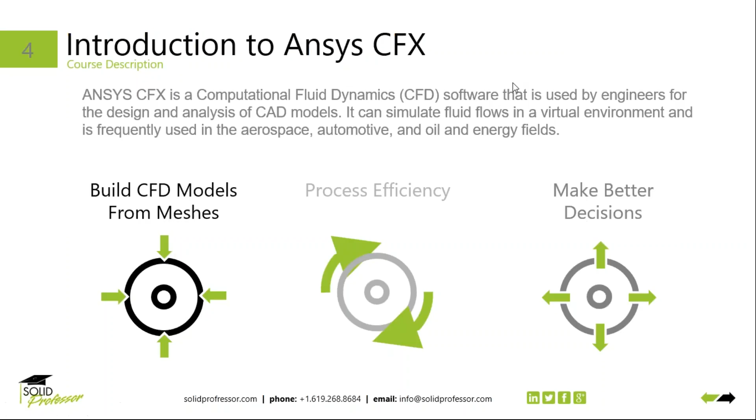We will jump in now and actually start playing a few of the videos here. Brian, do you want to talk briefly about what's covered in this lesson on mesh generation? Okay, sizing a mesh. I don't know if there's going to be the intro into what this is.

This is the example that you're going to see throughout most of the course that we're going to be doing all this analysis on. It's just a section of rigid tube where we have an inlet located there at the top, and the flow just goes in, makes a U-turn, and discharges there at the bottom. It's just a good representation of a simple geometry that will facilitate explaining all of this material. So in this particular video, we're going to talk about how to size a mesh once you've imported the CAD model into the Ansys meshing program.

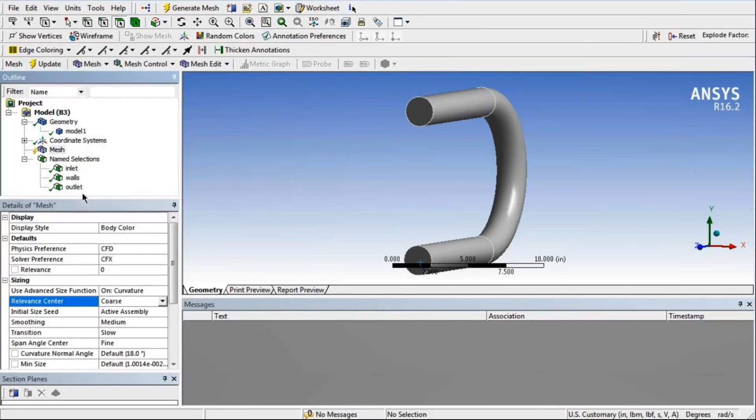The next step is to create an initial mesh, just so you have a visual of what the mesh will look like. To do that, I'll right-click on Mesh and select Generate Mesh. Now, as you can see, a coarse mesh has been defined for the model. If you take a look, you can see that even though the mesh is coarse, the resolution in the streamwise direction is actually not so bad.

The main problem with this mesh is the resolution near the walls. You can see it's extremely coarse in these regions here, and I need a much finer mesh here to resolve this boundary layer as the fluid travels through this tube. To do that, I'm going to have to insert a mesh inflation layer, which we'll take a look at in the next lesson.

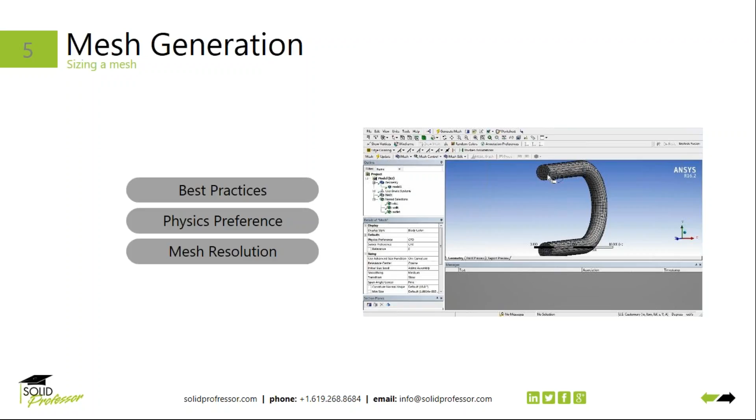So again, my apologies. So the next one is creating a model in CFX-Pre, and again, before we play the video, if you'd let Brian in a couple sentences explain what will be covered in this video in particular. Okay, so now we've created our mesh and we've imported it into the first CFX module, the pre-processing program, CFX-Pre. So in this particular video, we're going to talk about how to assign boundary conditions to this model.

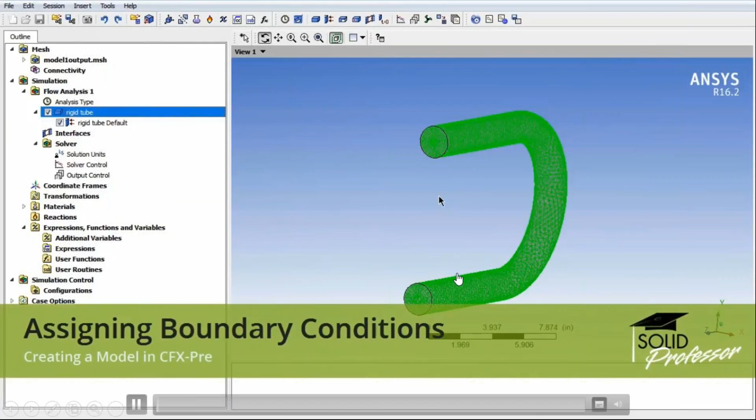In this video, I'm going to discuss the mechanics of assigning boundary conditions in CFX-Pre. I'll not go into very much detail at all, but rather show you how to set up the boundary conditions for this particular problem in the minimum number of required steps. So, continuing from the previous example, I've already defined the domain, rigid tube. Now I'm going to assign boundary conditions for that domain.

In this example, I will have 3 boundary conditions: an inlet located here at the top, a wall surface located here, and a discharge location on the bottom surface. First, I'll assign the inlet. To do so, I go to the domain, rigid tube, right-click on it, and select Insert Boundary. In this case, I'll define the inlet first and select OK.

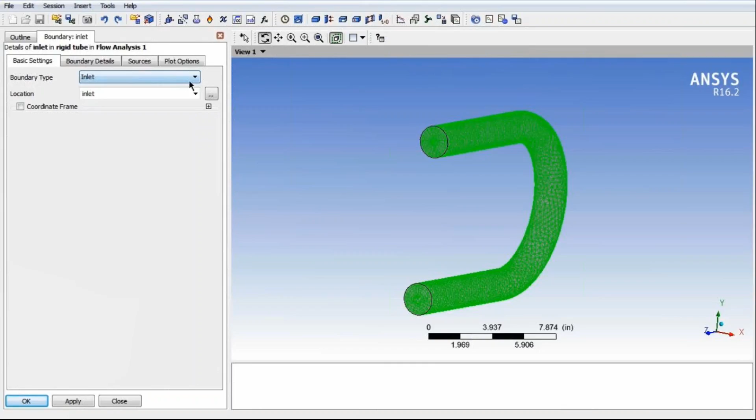The two options that I have to select are the boundary type and the location. In this case, the boundary type is an inlet, and it's going to try to select the correct one by default based on the title I gave the boundary. There are a number of other options, but clearly inlet is the appropriate type of boundary. So I'll select inlet. For the location, I have to select the surface associated with that boundary type.

There are three surfaces in this problem. These are the three that I defined when I created this mesh: inlet, outlet, and walls. So clearly inlet is the correct surface. It highlights, indicating that it is the one I want to use. Under boundary details, I'm going to select a total pressure and a total temperature to hold constant at this location.

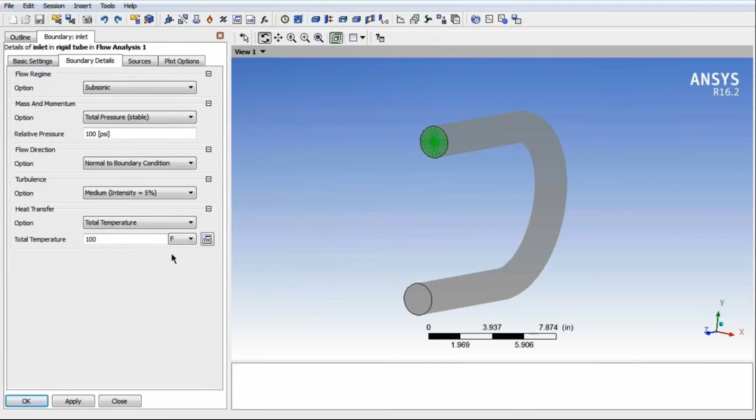Under mass and momentum, I'll select total pressure, indicating that I'm going to hold the total pressure constant at that location, and I'll specify 100 psi. Since there's heat transfer in this problem, I also have to specify the temperature here. So under heat transfer, I'm going to select a total temperature and hold it constant at 100 degrees Fahrenheit. Once I'm done, I'll click OK.

Now you can see arrows pointing into the domain, indicating that I have defined the inlet correctly. It now appears here, under rigid tube in the analysis tree. Next, I'll define the walls. I'll click on rigid tube and select Insert Boundary. In this case, I'll call it walls and select OK.

Just as before, it has correctly selected the boundary type and location. If it doesn't select it correctly, you might have to manually go in and change this. But in this case, it clearly selected the correct surfaces. Under boundary details, there are a number of options, but no slip wall is the default option.

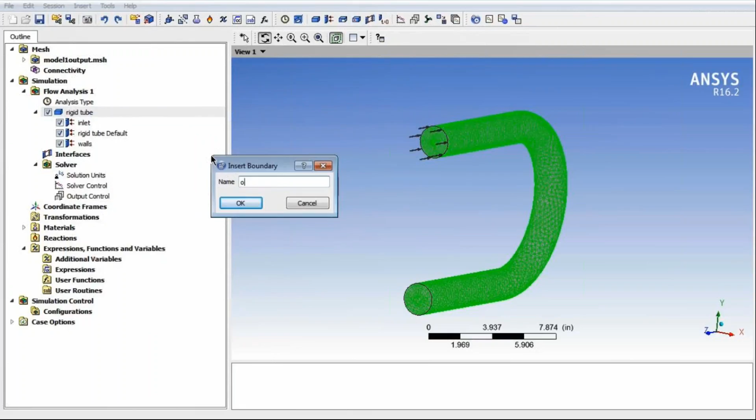That is fine for this project, so I'm going to click OK. I can now see that the walls have been defined. The last part to define is the outlet. So what I'm going to do now is right-click again and select Insert Boundary. In this case, I'll call it the outlet and select OK.

Just as before, it has correctly selected outlet for the boundary type and outlet for the location. And you can see it's giving me the correct location. Now at the discharge, all I'm going to do is hold the static pressure, or the average static pressure, constant at this location. So it's 100 psi at the inlet. I'm going to hold it constant at 80 psi at the outlet.

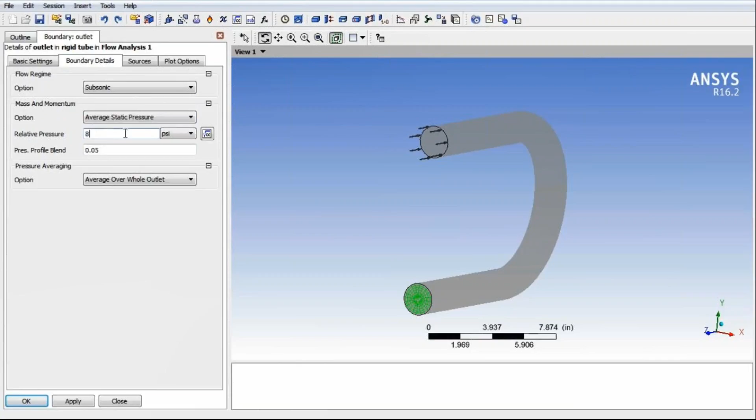And click OK. Now you can see the arrows are pointing in here and out of here. This indicates that this is a discharge, or an outlet boundary. As you've noticed, all of the default surfaces have gone away, and I have correctly defined the inlet, our walls, and the outlet. At this point, this problem is completely defined and ready to solve.

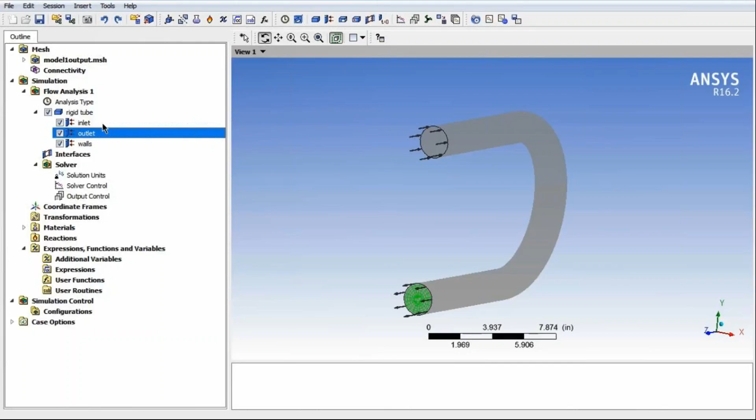In the next set of videos, I'll go over the different boundary condition types in more detail, so you can understand how to properly assign boundary conditions that will best represent your problem.

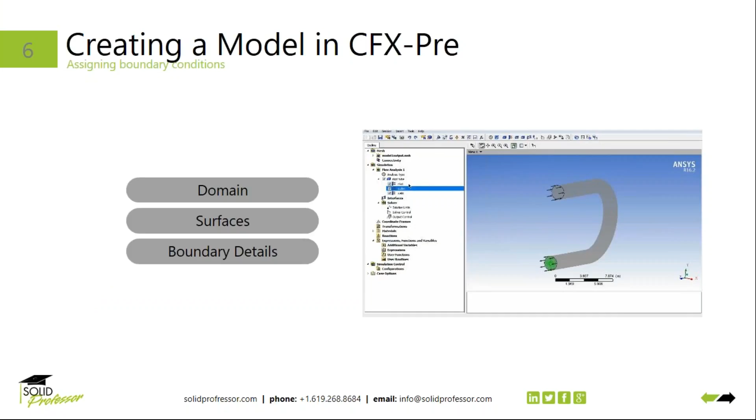All right, so you see we're kind of walking you through these series of videos, and you're getting a good representation of what you can expect in this course that was put together by Brian. And next we'll move on to the next step in the process, which is actually running the solver. And again, Brian, just briefly explain to our members and people listening in what to expect in this video and what will be covered.

This is basically after we've finished building the model. I will open up the solver manager and begin running the case. So this is going to show you how to import the solver input file, partition the case if you're going to be using multiple CPUs, and just taking a quick look at the residual convergence behavior of the problem.

Awesome. All right, so we'll dive right back into this one as well.

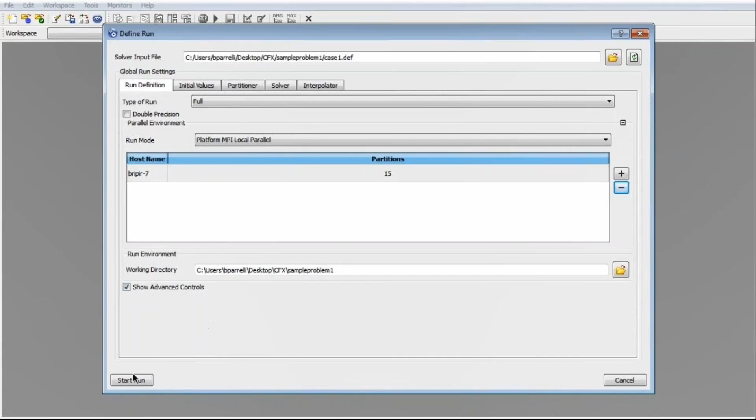This video will go over how to monitor convergence in a CFX problem. Recapping from the previous video, the solver input file, case1.def, was defined, and the problem was partitioned using parallel computing into 15 partitions. At this point, I'll start converging the case by clicking Start Run. After a few seconds, this screen will appear.

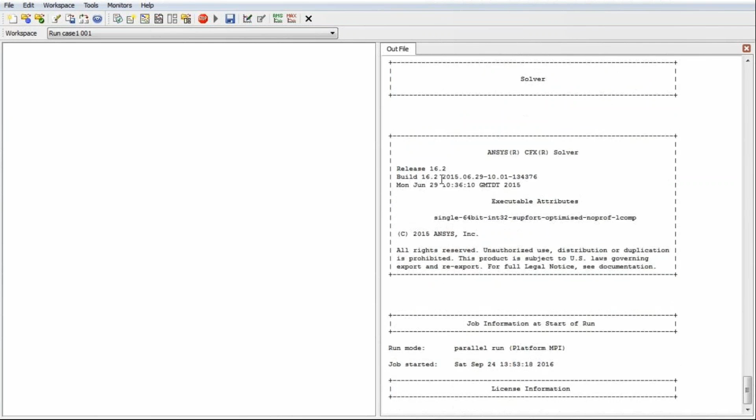On the right is a printout of the out file. This is a text file indicating the convergence behavior of the problem. This file will be written to the working directory once the case is converged. On the left, you can see a number of plots being created that are also an indication of the convergence behavior. The first plot is the momentum and mass plot.

This is telling you the residual convergence of your mass, which is the red line, and your 3 momentum components, which are the other 3 lines, as a function of your iteration. There is also a heat transfer plot and the turbulence plot. As you can see, as time goes on and as the iterations increase, the residuals are getting smaller and smaller. This is a classical behavior that you will see in CFD problems that are converging nicely.

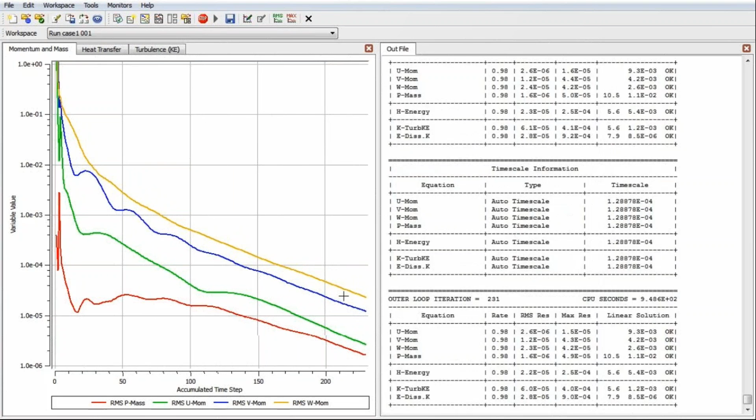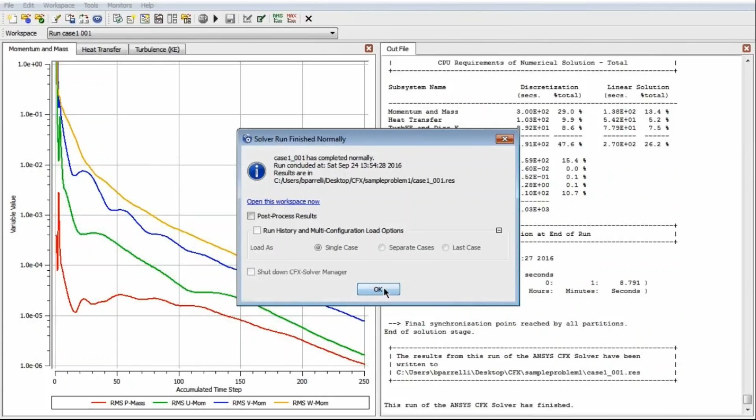At some point, the convergence will reach a level where the problem should stop on its own, indicating that the conditions specified in the solver settings have been met. And that is just what happened now. This screen will appear telling you the solver run had finished normally. But before getting into post-processing, I'm going to check the convergence and understand how well converged this problem is before moving on to the next step.

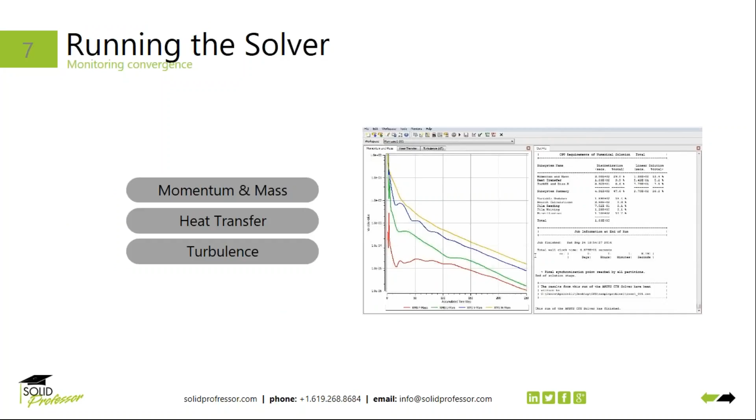All right. And then lastly, we have one more video we're going to play, and it's actually following that next stage in the process, which is post-processing the CFX study. Brian, again, just briefly for people that are unfamiliar, can you highlight what will be covered in this video?

Sure. So now we've converged the case, but this particular one is actually taken from a second hands-on exercise. So the geometry you see in this example is going to be different. It's actually an electrical circuit board with a heat source and some cooling fins. So that is a hands-on exercise that will also be covered in this course. And in this video, we're going to talk about post-processing this particular case.

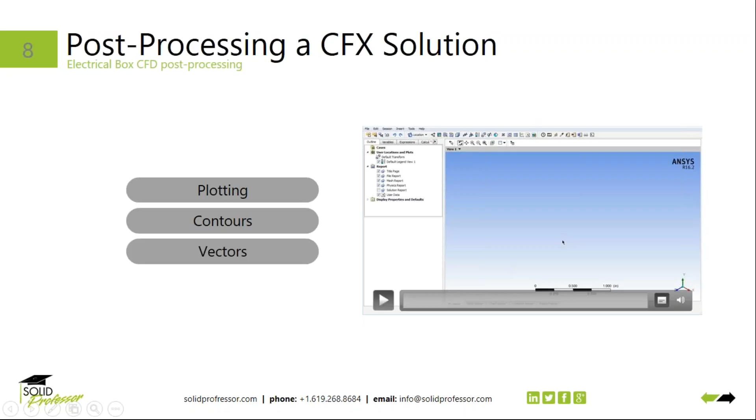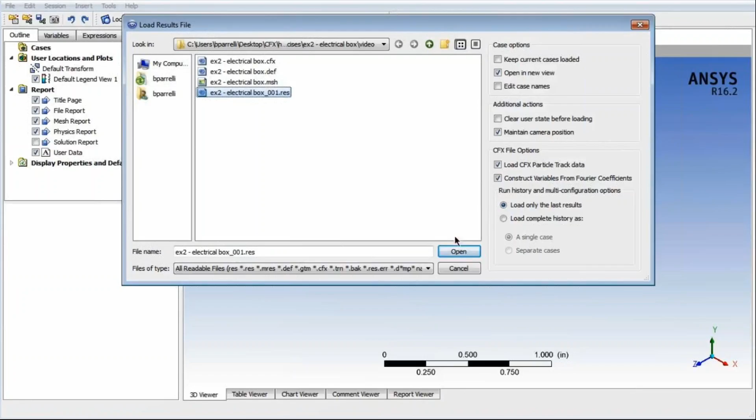Welcome to the final video of hands-on exercise number 2, in which I'll post-process the results of the electrical box CFD problem. I've already opened CFD Post here, so I'm going to go up to File and select Load Results to load the results file, and select electrical box_001.res. This file was created when I converged the case. You can see the outline of the geometry has now been imported.

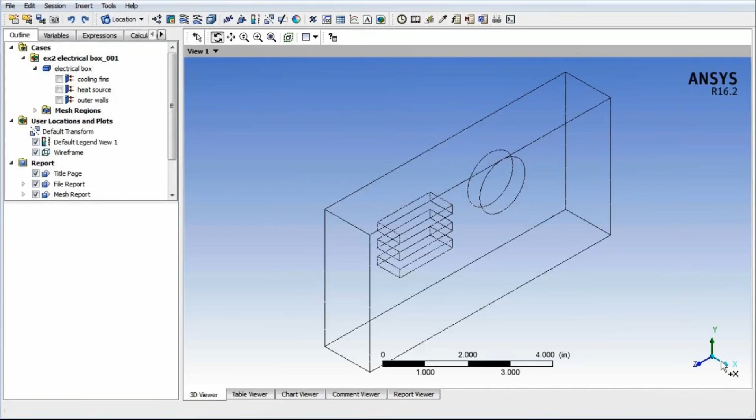A quick tip for rotating and manipulating the geometry. If you want to snap to any normal axis, you can simply click one of the 3 default axes, and it will snap to normal to that axis. To rotate about that axis, you can simply hold down the control button and move the mouse up or down. So in this case, I'm going to rotate it this way. And I'll zoom out a little bit so you can see the whole thing.

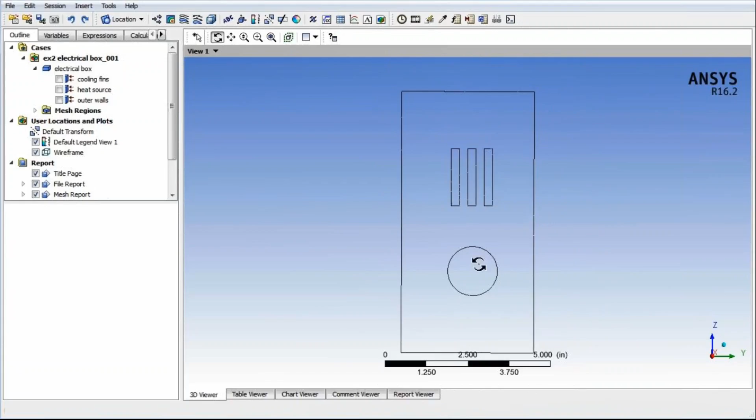And this is actually useful because I want gravity to kind of point down in the field of vision so I can understand what's going on. So remember, gravity is pointing in the negative z direction. So this is a good view to have for this example for plotting.

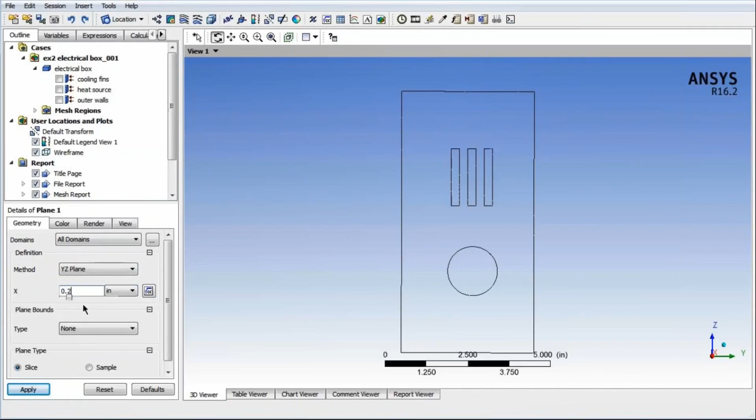So the next step, of course, is going to be to create a cut plane so I can plot things on it. So as before, I'm going to go to the location selection and select plane. I'll just call it plane 1. And in this example, it's going to be a YZ cut plane. So I'm going to select YZ plane. And the location will be at x equals 0.2 inches, which will cut this model right down the middle. I'll click Apply. And you can see the plane has now appeared.

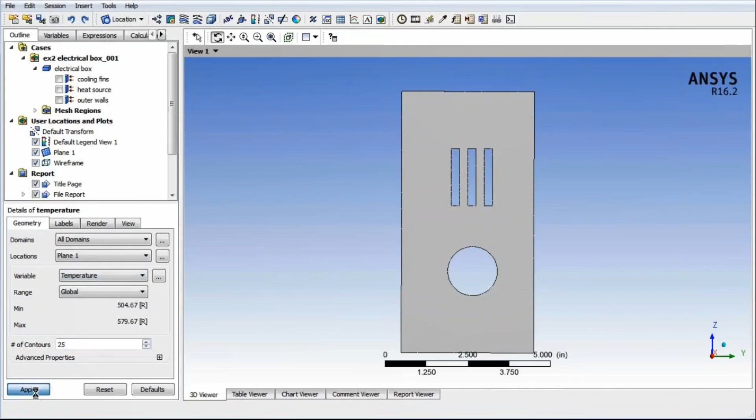Now I'm going to create some contour plots on that plane. So the first one I'll create is a temperature plot. I'll click the contour button and create a temperature plot. For the location, I'll select plane 1. And under the variable, I'll select temperature. And I'll plot 25 contours and click Apply. I'll go ahead and uncheck plane 1 so there's nothing overlapping or plotting on top of each other.

You can see under temperature there's a nice cool region here around the fins, and a little bit of a hotness around this heat source, but no major hot spots. You don't really want to see a huge temperature gradient anywhere in a problem like this because that would indicate a high thermal stress. So this is actually a good sign and is what you would want to see.

So now let's actually see what the velocity is doing in this problem. What I'm going to do next is to duplicate this temperature plot as a velocity plot. So I'll right-click on temperature and select duplicate. In this case, I'll call it velocity and select OK. Now I'll uncheck the temperature plot and double-click the velocity plot. All I have to change on it is the variable. Everything else will be the same. It says temperature because I duplicated it, so I'll just select velocity and click apply.

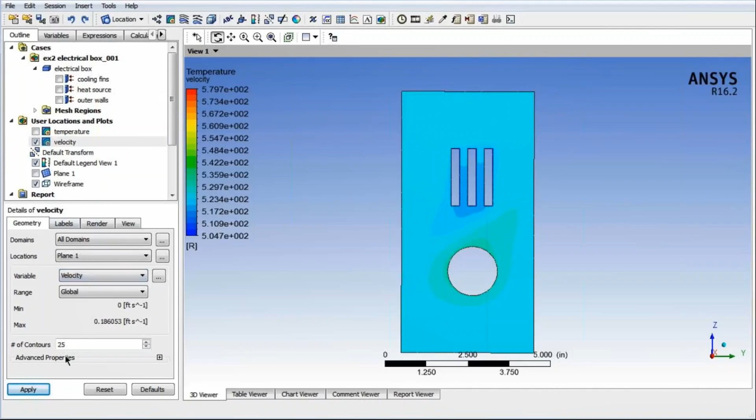You can see this one looks much more interesting. You can see there's very low velocity here on the heat source, but naturally it speeds up as it goes around this location here, and it slows down a little bit more here. So it's giving you a good overall picture of where the velocity is high and low, but it's not really telling you a lot about the direction.

So I'll now create a vector plot to give some indication of what the vectors are actually doing. So to do that, I'm going to click this button here for vector. I'll just call it the default vector 1 and select OK. For the locations, I'll select plane 1. As far as the sampling, for now I'll just leave it as is.

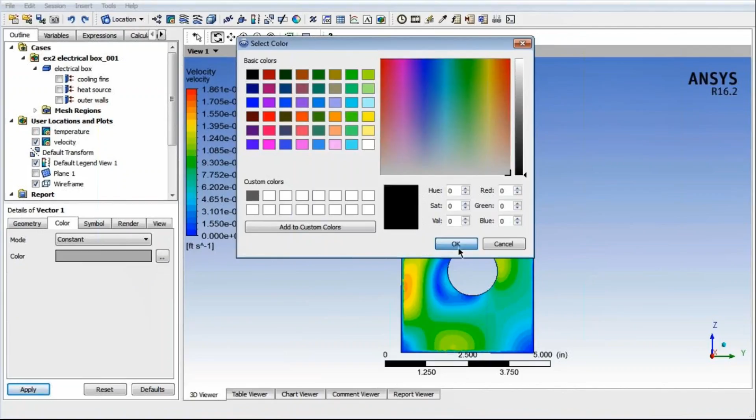But under the color, instead of coloring it by a variable, which I've already done with the velocity, I'm just going to leave it a constant color. And this is sometimes useful when you're only interested in seeing the arrows themselves and not coloring them by any variable. You can actually specify, by clicking this button, what color you want for those arrows. And I'm just going to specify them as black. I'll click black, select OK, and click apply.

And this looks quite busy as before. So remember what I did last time. I can actually select, instead of vertex sampling, equally spaced sampling. And I'll do 1,000 vectors to start with. Now it looks much cleaner. I'll zoom in a little bit and see what's going on.

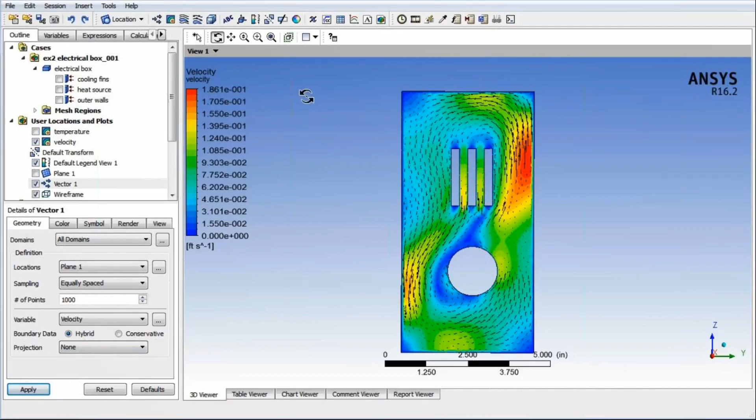You can see that the fluid is actually rising up away from this heat source and really speeding up around here and turning around these fins and then coming back down, where it's getting hot again and cycling through. So that's what the velocity field is doing. So remember, gravity is pointing down, so as the fluid heats up, we would expect it to go up. And then as it cools back down, we expect it to go back down. And that's exactly what's happening here.

So the last thing I'm going to do for this post-processing exercise is to create an expression to determine what the maximum wall temperature is on this model.

To do that, I'm going to select Expressions, right-click on this region, select New, and call it Tmax Wall. Click OK. In the Definitions box, I'll right-click, and under Functions, I'll select Max Value.

In the parentheses, I'll right-click again, and under Variables, I'll click Temperature. Finally, I'll right-click again, and under Location, I'll select the outer walls, and click Apply.

You can see there's an outer temperature of 533.3 Rankine, which is approximately 73.6 Fahrenheit. So that's indicating the maximum outer temperature is just a few degrees above what the fin temperature was indicating, that this is a very good design and there's nothing to worry about. The temperature on the wall is not very hot at all, so I'm pretty much okay with this, and I'm ready to call this design done.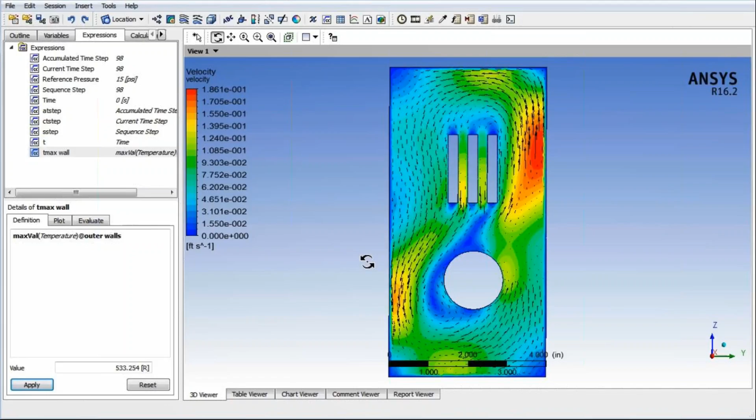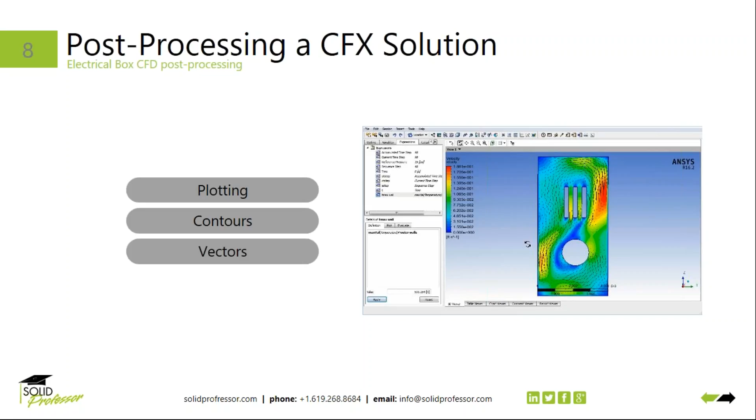All right everyone, so that's the last of the videos we're going to play, but just to summarize, we went through and taught you guys in Ansys CFX how to create a mesh, how to set up the study. We actually ran that study, and then we showed the post-processing. That was actually one of the exercises in the lesson, to post-process that study.